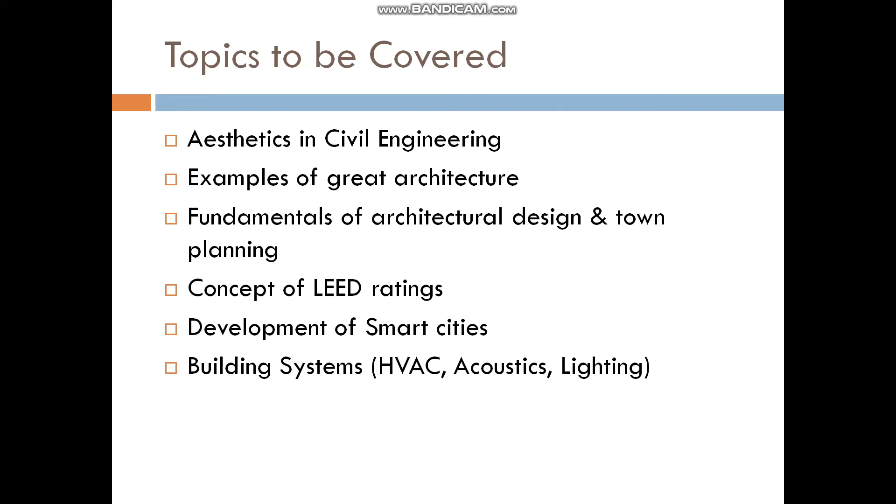Now let us proceed to the lecture. In our current lecture, we will mostly focus on architecture and issues related to architectural concepts in construction. In architecture, aesthetic is an important aspect. So what does aesthetic mean? Basically, it is concerned with beauty or the appreciation of beauty.

The definition of aesthetic is being interested in how something looks and feels. An example of someone who is aesthetic might be an artist. Aesthetic means the pleasant, positive or artful appearance of a person or a thing. An example of the use of the word is to say that a particular car is beautiful.

What does aesthetics mean in engineering? Aesthetics is the philosophical study of beauty and taste. The term stems from the Greek word aesthetikos, meaning of sense perception, and it is related to the study of sensory values. In design, aesthetics refers to the visual attractiveness of a product.

It is often mistakenly associated with surface beauty rather than being defined as having to do with feelings. When aesthetics is understood as having to do with overall perceptions of quality, it becomes obvious that most engineering decisions affect the aesthetics of a product.

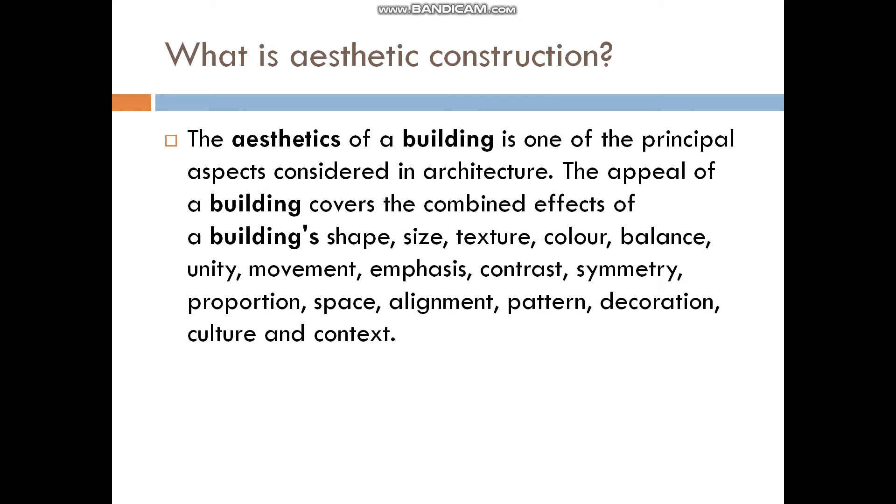So, being a civil engineer, we need to have a clear idea of aesthetic construction. In view of this, we need to know what is aesthetic architecture, that means what is the relation between aesthetic and architecture. As we have already gone through, aesthetics is the branch of philosophy that deals with the nature and expression of beauty. And how does it relate to architecture?

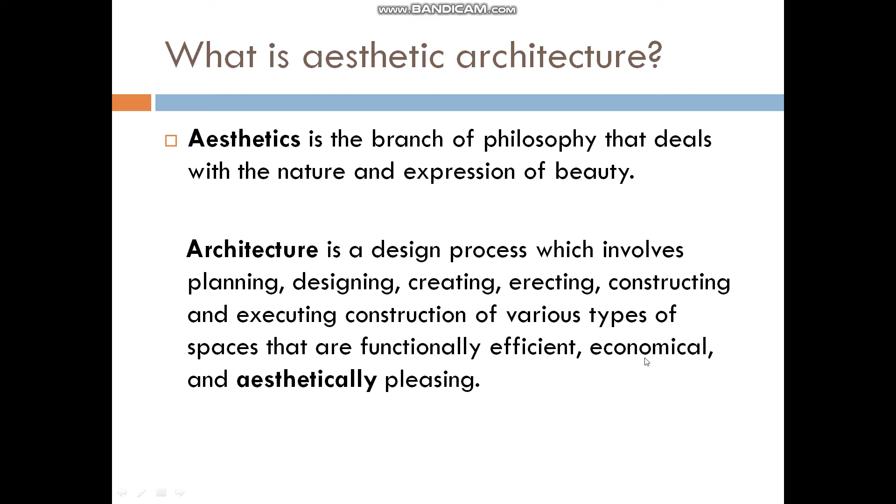Because architecture is a design process which involves planning, designing, creating, erecting, constructing, and executing construction of various types of spaces that are functionally efficient, economical, and aesthetically pleasing.

So now we know that principles of architecture are used to make a structure aesthetic, that means beautiful. So how can a structure be used for aesthetic purpose? The answer is, a structure should have a pure, clear, preferably simple form and bring a feeling of stability. Its form should also correspond with the materials used.

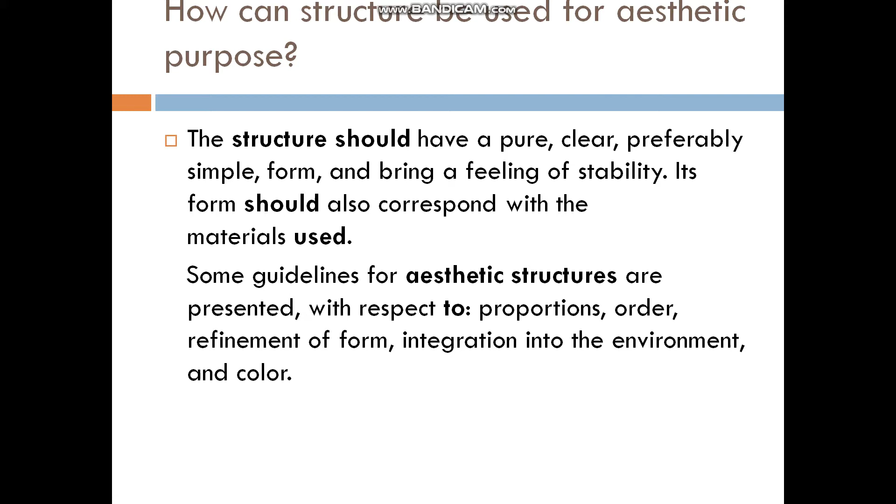Some guidelines for aesthetic structures are presented with respect to proportions, order, refinement of form, integration into the environment, and color. So in order to make a structure aesthetic, we need to apply these guidelines, that means we should follow these guidelines to make a structure or to use a structure for aesthetic purpose.

So what are the aesthetic considerations we should apply in architecture for the construction of a structure, or what we should consider in architecture for the construction of an aesthetic structure? The aesthetic considerations are as follows: line, shape, size, texture, color, balance, unity, movement, emphasis or contrast, symmetry, space, alignment, culture, context.

An architect should follow these aesthetic considerations for the construction of new structures to make it more beautiful or aesthetic. So we can understand that aesthetic is an integral issue in the architectural process for constructing structures. Being a civil engineer, our job is not only to make a structure functional and serviceable, but also we should consider the aesthetic aspects of the structure.

Now, let us have a look into some examples where you can see the application of aesthetics in the architecture of a structure.

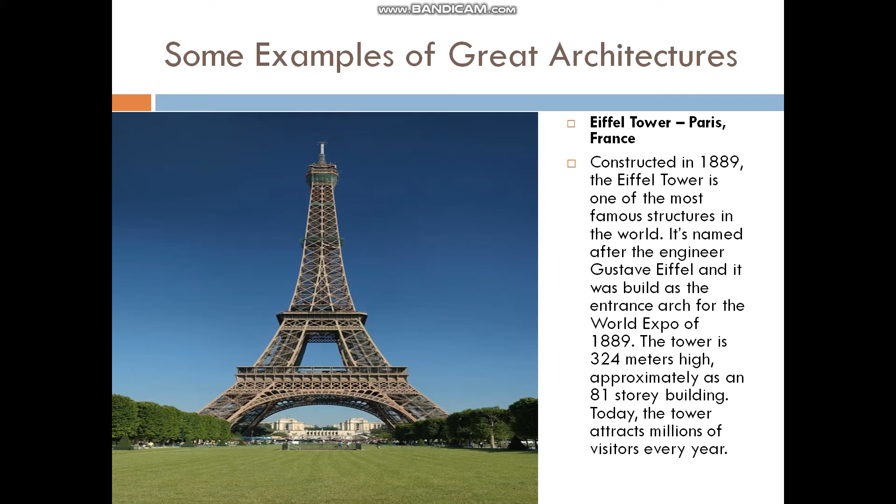Not only this, but we have some more examples to show which actually depict the importance of aesthetics for a structure.

The first one is the Burj Al Arab, situated in Dubai. It is built on an artificial island 280 meters away from the coast, and it is one of the most luxurious and fourth tallest hotels in the world. It is 321 meters high, representing one of the wonders of contemporary engineering. The building was designed by Tom Wright of famous WKK architects, and its shape emulates the shape of a ship's sail.

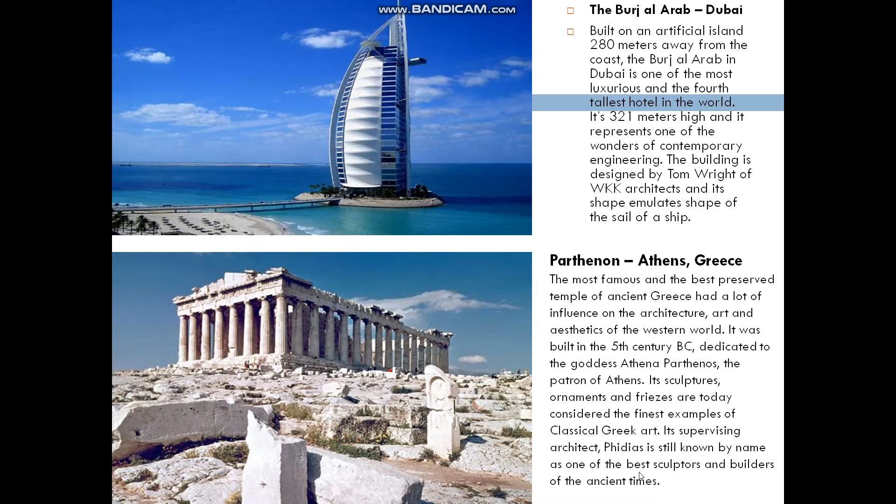The second one is the famous Parthenon, situated in Athens, Greece. The most famous and best preserved temple of ancient Greece had a lot of influence on the architecture, art and aesthetics of the Western world. It was built in the 5th century BC, dedicated to the goddess Athena Parthenos, patron of Athens. Its sculptures, ornaments and friezes are today considered the finest examples of classical Greek art. Its supervising architect, Phidias, is still known by name as one of the best sculptors and builders of ancient times.

The third one is the famous Sydney Opera House. It is one of the most famous opera houses in the world because of its building structure. It was designed by Danish architect Jorn Utzon, celebrated for groundbreaking modern design. Sydney Opera House was opened in 1973, staging large theatrical productions. You can see the beautiful design and aesthetics of this Sydney house, as shown in the picture.

The next one is the famous Petronas Towers, the famous twin towers of Kuala Lumpur in Malaysia. These twin towers were the tallest buildings in the world from 1998 to 2004, and still are the tallest twin buildings in the world. Their complex and super modern design actually initiated the construction of postmodern Kuala Lumpur.

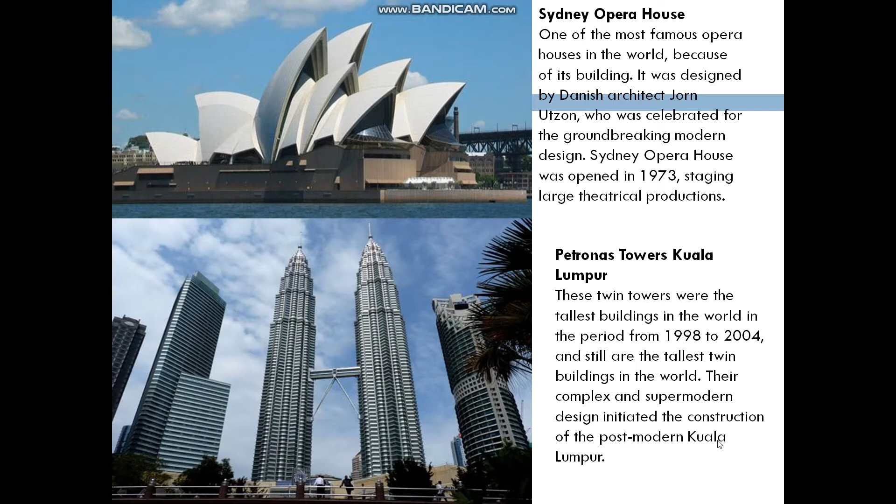The next one is the famous Flatiron Building of New York. This is a classic example of the groundbreaking triangular solution of early modern architecture. The Flatiron Building was designed by Mr. Daniel Burnham and completed in the year 1902. This New York landmark was the tallest building in the world at the time it was completed.

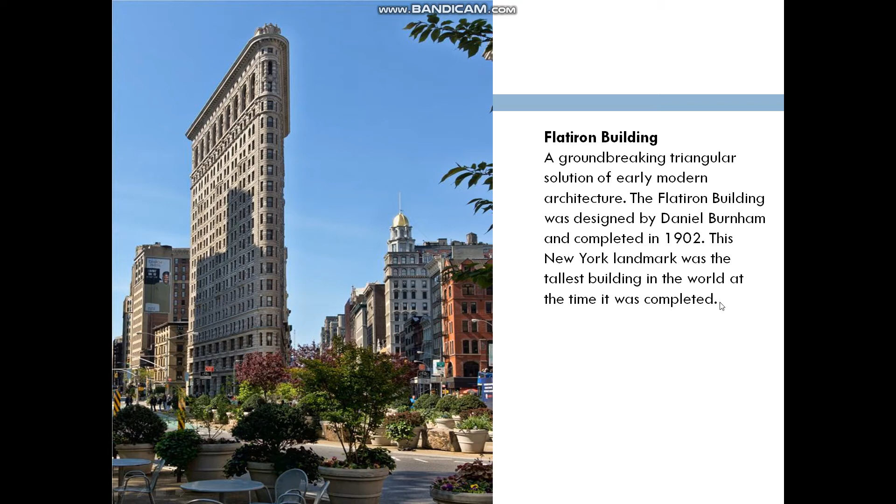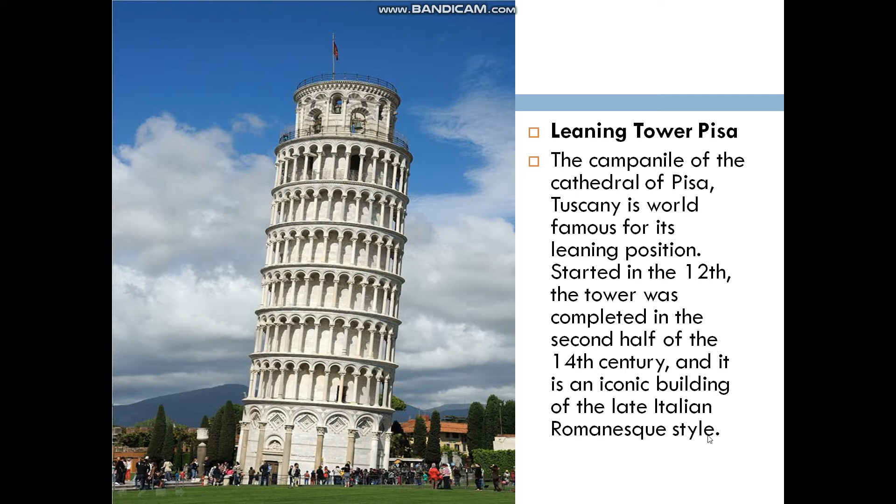From all of the examples we have mentioned here, it shows that aesthetic is an integral part of a structure and how important this is. Being a civil engineer, it should be our objective to make a structure not only functional and serviceable for a long time, but also aesthetically pleasant and beautiful.

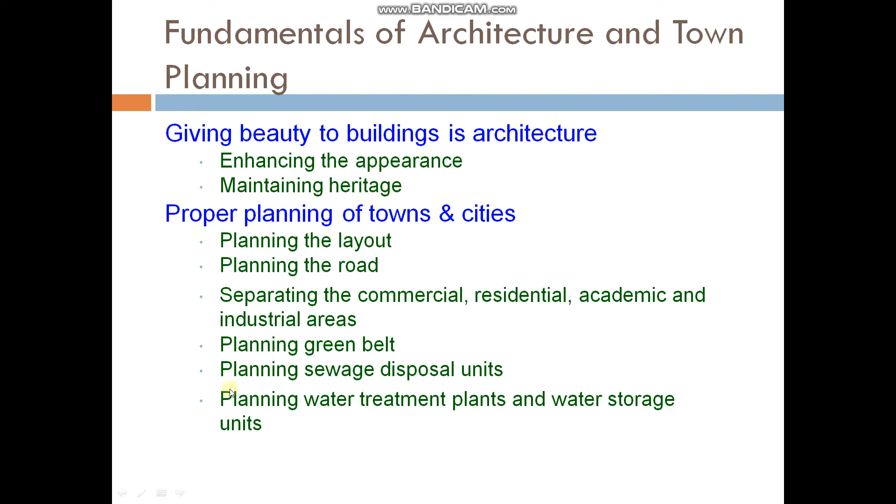So these are the major fundamentals of architecture and these are the major fundamentals of town planning. Now let us have some idea regarding town planning. So what is town planning?

Town planning basically is an arrangement of various components or units of a town in such a way that the town as such attains the significance of a living organism. With the help of knowledge of town planning, it helps in achieving the best possible advantages of the situation of town with respect to its land and the surrounding environments.

Town planning is a science as well as an art. And this art lies in arranging the components of a town in such a way that the final result is in the form of a beautiful, convenient, economical and efficient unit.

From this discussion, we can understand why town planning is important. It is important because planning looks at the needs of people and the environment whilst respecting limits to development. Urban planning must recognize the regional limits to development in order to maintain natural habitats and biodiversity, which is so important to our continued existence.

So the objectives of town planning, that means what we achieve by applying the principles of town planning, are beauty, convenience, environment, and health.

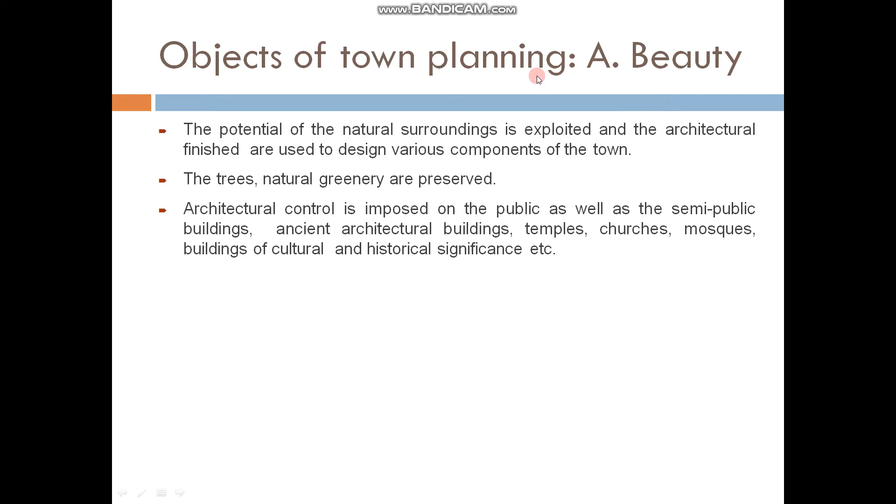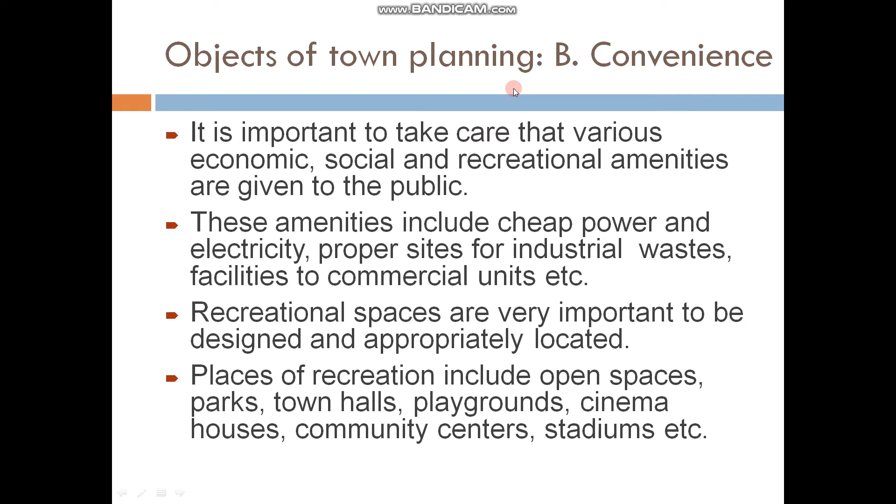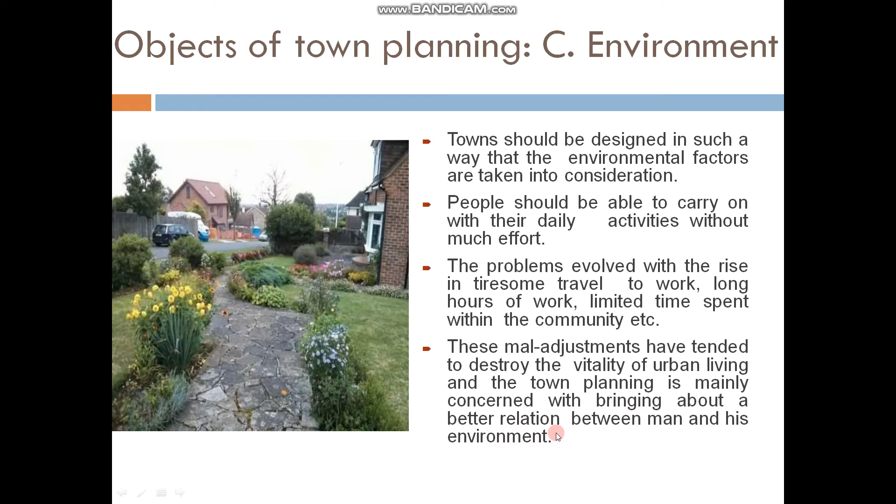We have discussed the various objectives of town planning, and from this discussion it is clear that if we can achieve these objectives, it will be very easy to implement the proper principles of town planning for constructing a new town or development of a town.

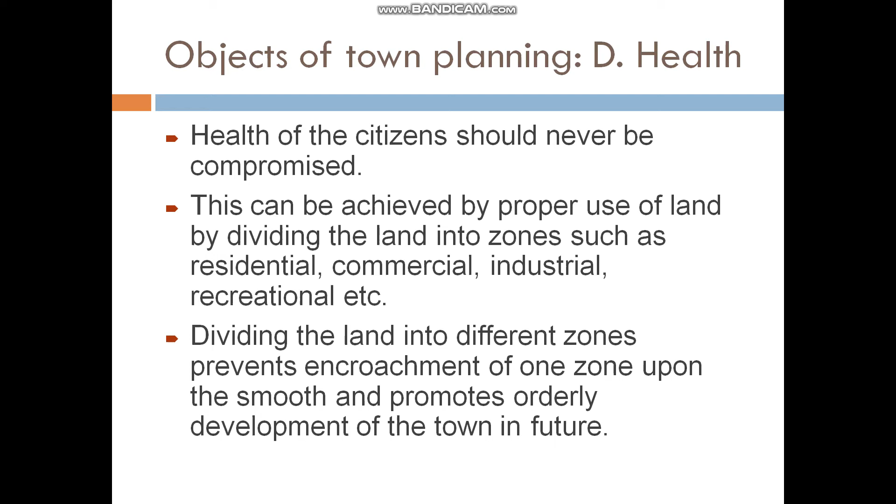So now the big question is, why is town planning important? That means, what are the necessities of town planning? The answer is to avoid certain evil situations within a town or a city.

Evil situations mean a defective road system resulting in the formation of narrow streets and lanes, development of slums and squatter settlements, heavy traffic congestion during working hours, inadequate open spaces for parks and playgrounds resulting in unhealthy living conditions, lack of essential amenities like electricity, water supply, and drainage, noisy atmosphere disturbing the peace of city dwellers, and uncontrolled development of the town leading to unhealthy living conditions.

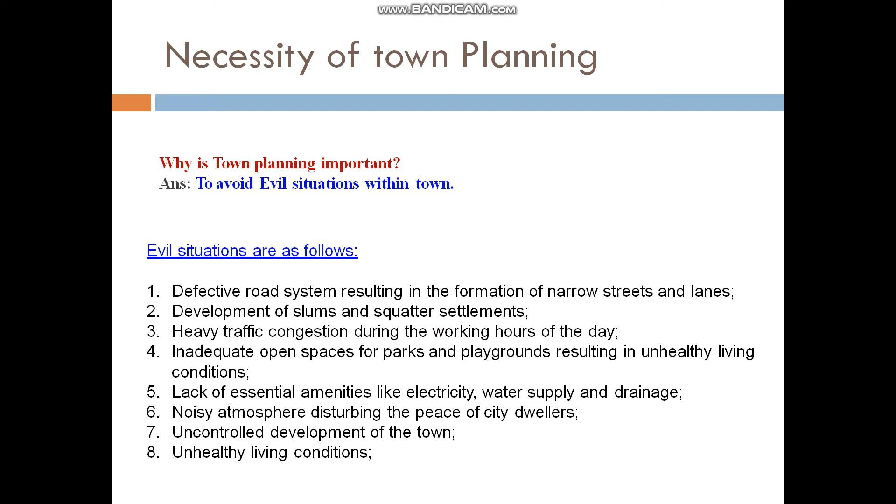So, to avoid these evil situations, a proper town planning is required. In view of the discussion regarding town planning, smart city is a very new concept. So basically, what is a smart city? The answer is there is no universally accepted definition of a smart city. It means different things to different people.

The conceptualization of a smart city therefore varies from city to city and country to country, depending on the level of development, willingness to change and reform, resources, and aspirations of the city residents. A smart city would have a different connotation in India than, say, Europe. Even in India, there is no one way of defining a smart city. Some definitional boundaries are required to guide cities in the mission.

In the imagination of any city dweller in India, the picture of a smart city contains a wish list of infrastructure and services that describes his or her level of aspiration. To provide for the aspirations and needs of the citizens, urban planners ideally aim at developing the entire urban ecosystem, which is represented by the four pillars of comprehensive development, that is, institutional, physical, social, and economic infrastructure. This can be a long-term goal, and cities can work towards developing such comprehensive infrastructure incrementally, adding on layers of smartness.

In order to understand the definition of a smart city, we need to have an idea of its features. So, the smart city features are as follows. The first one is promoting mixed land use in area-based developments, that is, planning for unplanned areas containing a range of compatible activities and land uses close to one another in order to make land use more efficient. The states will enable some flexibility in land use and building bylaws to adapt the changes.

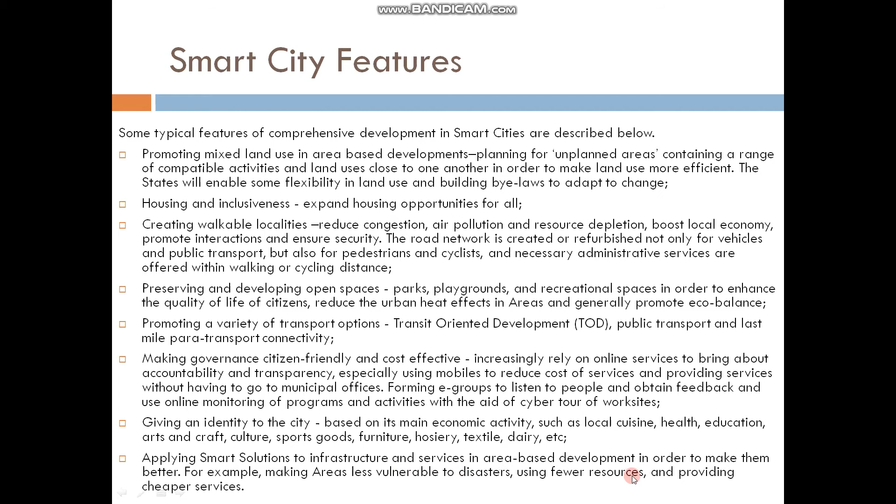The next important smart city feature is giving an identity to the city. That means based on its main economic activity such as local cuisine, health, education, arts and craft, culture, sports goods, furniture, hosiery, textile, dairy, etc. The last important feature of smart city is applying smart solutions to infrastructure and services in area-based development in order to make them better. For example, making areas less vulnerable to disasters, using fewer resources, and providing cheaper services.

Now, let's have a look at the Smart City mission of India. Government of India plans to develop 100 smart cities by the end of 2020. The Smart City mission will be operated as a centrally sponsored scheme, and the central government proposes to give financial support to the mission to the extent of rupees 48,000 crores over 5 years, that is on an average of rupees 100 crore per city per year.

Construction of green building is the latest application of architectural concept. In this regard, LEED rating system is an important aspect. The leadership in energy and environmental design, that is LEED system, was designed by the United States Green Building Council to evaluate the influence of building design and construction on the environment. The LEED rating system has 7 areas of concentration, and those are sustainable sites, water efficiency, energy and atmosphere, materials and resources, indoor environmental quality, innovation in design process, and regional priority.

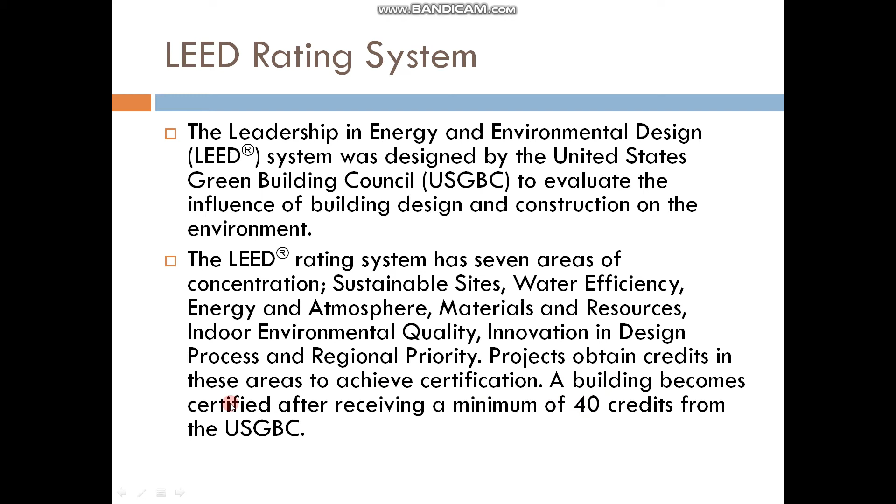Projects obtain credits in these areas to achieve certification. A building becomes certified after receiving a minimum of 40 credits from the USGBC. Here you can see the 7 categories considered for the LEED rating system, along with the maximum available points that can be achieved for each category.

For sustainable sites category, the maximum available points is 26. For water efficiency category, the maximum is 10. For energy and atmosphere category, the maximum is 35. For materials and resources category, the maximum is 14. For indoor environmental quality, the maximum is 15.

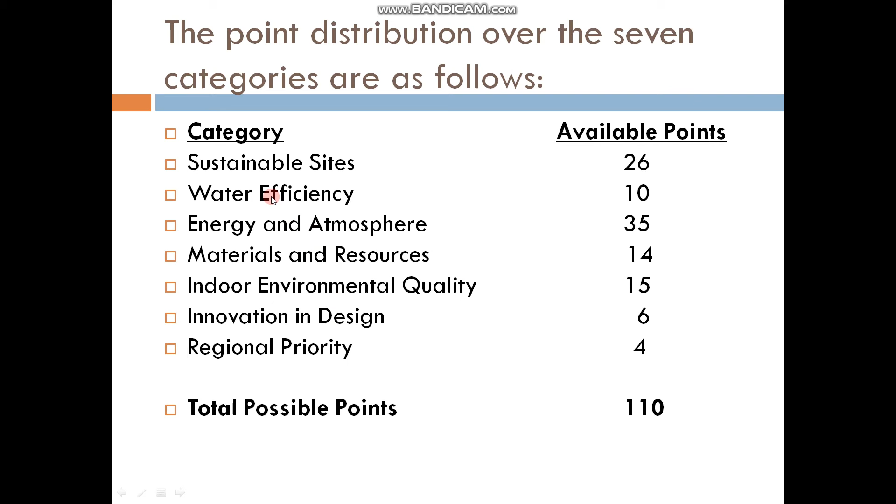For innovation in design category, the maximum available points is 6. For regional priority category, the maximum is 4. So together, the maximum available points that can be achieved is 110. Basically, all of these categories are scrutinized very efficiently in order to certify a building as per the LEED rating system.

One point should be remembered: a building becomes LEED rating system certified only after receiving a minimum of 40 credit points from USGBC, that means from United States Green Building Council. After thoroughly evaluating all the categories, if a building gets credits between 40 and 49 points, then the building is certified as LEED certified. As mentioned, the minimum points to be achieved is 40.

If a building achieves a credit point between 50 and 59 points, it is certified as silver level from the LEED rating system. If a building achieves a credit point between 60 and 79 points, it is certified as gold level. Whereas in order to achieve platinum level certification, a building has to get 80 plus credit points. A building is awarded any certification level only after a thorough and detailed investigation of all 7 categories associated with the LEED rating system, and this detailed investigation of each category is very important for the LEED rating certification of a building.

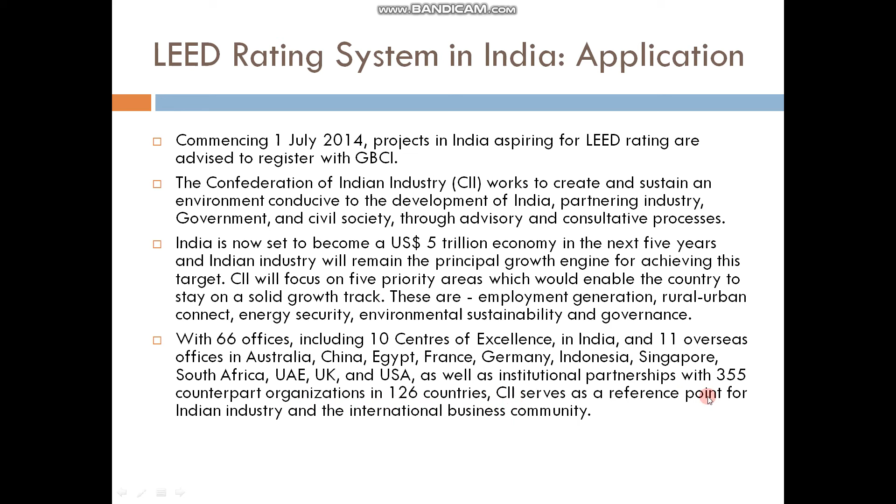CII will focus on 5 priority areas which would enable the country to stay on a solid growth track: employment generation, rural-urban connect, energy security, environmental sustainability, and governance. With 66 offices, including 10 centers of excellence in India, and 11 overseas offices in Australia, China, Egypt, France, Germany, Indonesia, Singapore, South Africa, UAE, UK, and USA, as well as institutional partnerships with 355 counterpart organizations in 126 countries, CII serves as a reference point for Indian industry and the international business community.

The green building movement in India was triggered off when the CII Sohrabji Godrej Green Business Center building in Hyderabad was awarded the first and most prestigious platinum rated green building rating in India. Since then, the green building movement in India has gained tremendous impetus over the years.

With a modest beginning of 20,000 square feet of green built-up area in the country during the year 2003, today more than 5,894 green building projects are coming up with a footprint of over 7.16 billion square feet registered with the Indian Green Building Council, that is IGBC, out of which 1,995 green building projects are certified and fully functional in India. This growth has been possible with the participation of all stakeholders in the green building movement.

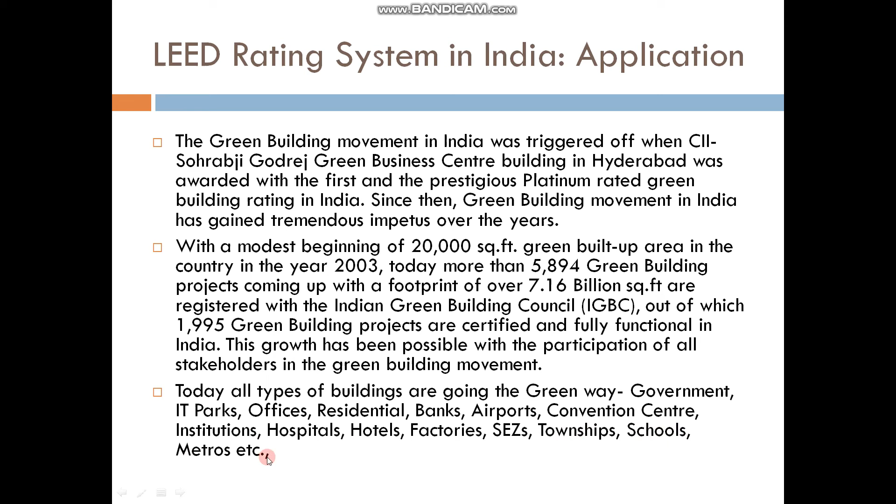Today, all types of buildings are opting the green way—government buildings, IT parks, offices, residentials, banks, airports, convention centers, institutions, hospitals, hotels, factories, townships, schools, metros, etc. Heating, ventilation and air conditioning system, that is the HVAC system, is an integral part of modern day building technology. This system provides heating and cooling to residential and commercial buildings.

You can find HVAC systems anywhere from single family homes to submarines, where they provide the means for environmental comfort, becoming more and more popular in new construction technology. These systems use fresh air from outdoors to provide high indoor air quality.

The V in HVAC system, or the ventilation system, is the process of replacing or exchanging air within a space. This provides a better quality of air indoors and involves the removal of moisture, smoke, odors, heat, dust, airborne bacteria, carbon dioxide and other gases, as well as temperature control and oxygen replenishment.

So how does an HVAC system work? The three main functions of an HVAC system are interrelated, especially when providing acceptable indoor air quality and thermal comfort. Your heating and air conditioning system is often one of the most complicated and extensive systems in your home, but when it stops working, you will know soon enough.

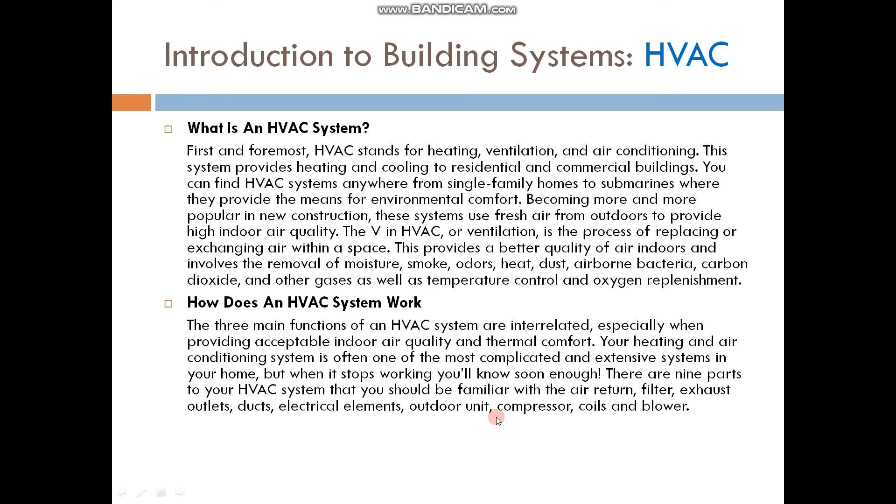There are 9 parts to your HVAC system that you should be familiar with, and those are air return, filter, exhaust outlets, ducts, electrical elements, outdoor unit, compressor, coils and blower.

Another important building system is the acoustics. Acoustics is the study of physics of sound. Acoustics in buildings concerns about the controlling of quality and amount of sound inside a building.

It is used to allow for pleasant sound in a concert hall and to reduce echoes and noise within an office building. Acoustics also concerns about suppressing sound coming from outside the building, such as in apartments. Building acoustics are an important consideration in the design, operation and construction of most buildings and can have a significant impact on health and well-being, communication and productivity.

They can be particularly significant in spaces such as concert halls, recording studios, lecture theatres, and so on, where the quality of sound and its intelligibility are very important.

Building acoustics can be influenced by certain factors. Number 1 is the geometry and volume of a space. Number 2 is the sound absorption, transmission and reflection characteristics of surfaces enclosing the space and within the space. Number 3 is the sound absorption, transmission and reflection characteristics of materials separating the spaces.

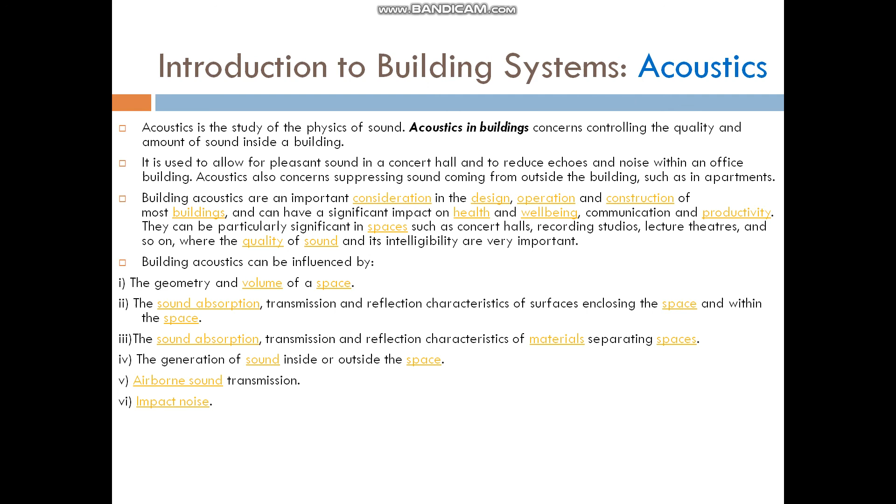Another important aspect of building system is the lighting system. Generally, we use artificial lighting for this application, but artificial lighting uses a lot of energy in our homes and workplaces. In a typical home, lighting will account for about 10% of the total electricity use. In an office, it can be even 30% or more.

In a lighting-intensive retail environment, it could be more than 50%. For small commercial tenants who only pay for light and power, it could be as much as 70% of the total electricity costs. Inefficient lighting also gives off a lot of heat, increasing the energy needed for air conditioning.

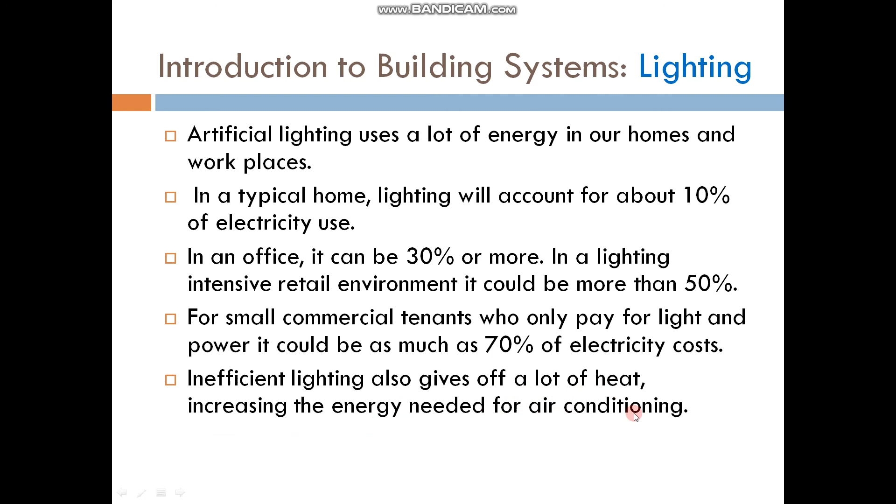In order to avoid the complexity of the use of artificial lighting, the one and only solution is the use of the right amount of light. Here, we have mentioned the recommended values of illumination, which are applicable for the different portions of the building.

For corridors and walkways, the recommended illuminance should be around 40 lux. Whereas in the interiors, where lighting is used very intermittently, like change rooms, lobbies, storage areas, loading bays, stairs, the recommended illuminance is around 80 lux.

For staff canteens, entrance halls, etc., the recommended illuminance is around 160 lux. For continuously occupied areas with easy visual tasks of reading, writing, typing, for inquiry desks, for libraries, the recommended illuminance is around 240 lux.

For routine office tasks of reading, writing, typing, inquiry desks, for libraries, the recommended illuminance is around 320 lux. For intensive work like drawing boards, town planning and inquiry counters dedicated to viewing paper plans, the recommended illuminance is around 600 lux.

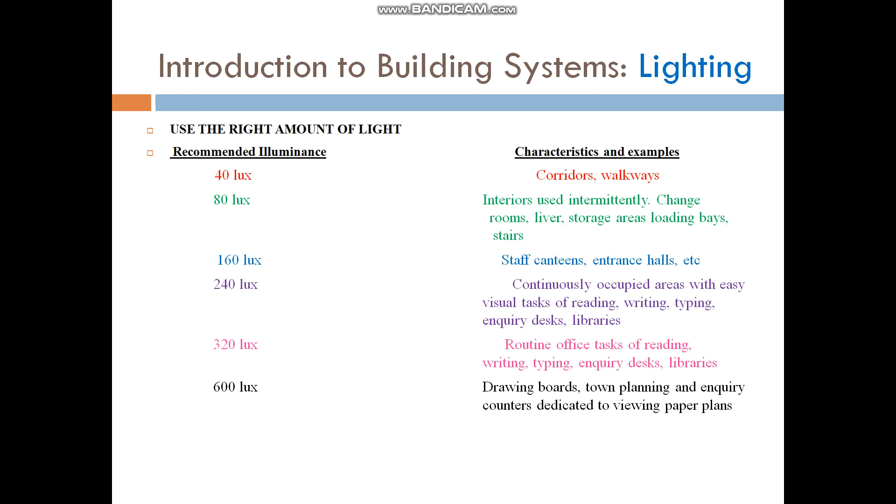So we can see that proper use of lighting as required for various applications can actually save a lot of energy, and this is an important aspect for the concept of energy saving as applicable for a building in terms of its functionality. From the discussion we have done in this lecture, it is clear that the proper application of design, aesthetics, planning, lighting, and acoustics are very much important for the proper function of a building.